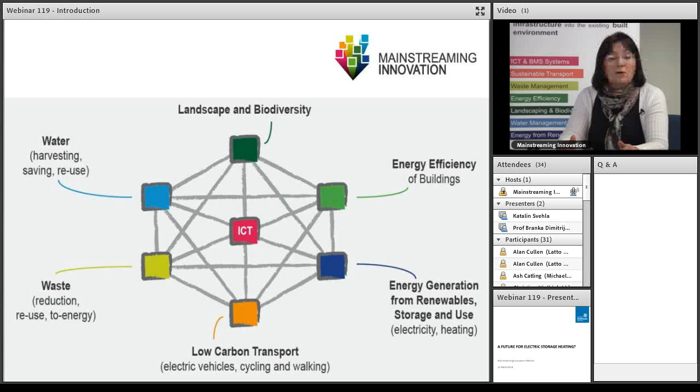So that is a brief introduction of our webinar on the future for electric storage heating. This is a webinar that will be presented by speakers and researchers of University of Strathclyde, and they are Katalin Svehla and Simon Gill. Welcome, and I would kindly ask you to start with your presentations.

Okay, thank you very much for inviting us to give this talk. You'll see that our version of this talk has a question mark after it. Does electric storage heating have a future? It is a very unfashionable topic at the moment, very 80s technology. Lots of storage heaters were introduced all over Europe when they were building nuclear power plants in the 1980s. And now they're all being ripped out again as fast as people can take it, because it was clunky, it was not so easy for the occupants to use, and the focus of modern technology has moved on to other things.

However, given that the future world of renewables requires storage, and storage is the holy grail, I think it's been called in other areas, for making a green electricity grid function. And actually we've got a lot of distributed storage out there, although it's an old technology. It's proven, it's relatively cheap to install, and it's got a high energy storage density. So, question. Does it have a future? Can it have a future in a green grid world?

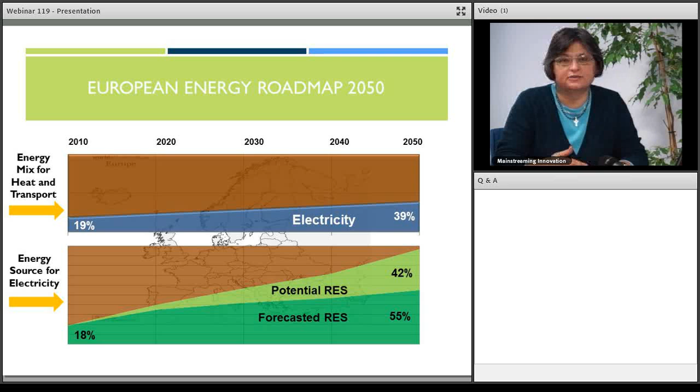So in order to make that happen, a lot of things need to be put in place, because we're certainly not there now. And there is a great deal of work at every level, from European down to individual network level, around how do we make the transition from where we are now to a smart grid enabled world where all the systems are interconnected, everything is flexible, everything can be changed very quickly, and where there's a lot of storage and distributed storage.

And although I don't think Glen Dimplex would claim that they're going to solve the whole smart grid problem for Europe, they see distributed heat storage and flexible demand as a key component of the end solution.

And they look at it from the point of view of what's happened to telecommunications technology over the last 25 years. Certainly when I was going to university, we had fixed telephones. It was a single centrally controlled system, and the telephone at the end depended on everything happening in the middle, in the centre, to work correctly. Today, we just expect telecommunications to be there everywhere and at all sorts of levels in our day-to-day lives. We expect two-way data flows, not just one-way. And this has happened quite quickly, in fact.

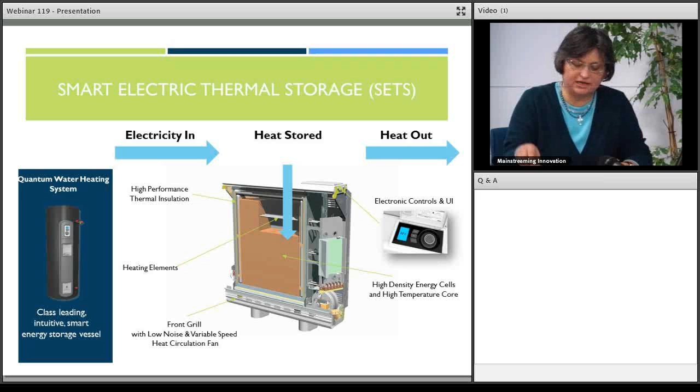How am I doing for time?

But also there is an element of hot water demand for the water heaters, which goes on all year, and so the smart heaters will perform both in the winter and the summer, and a little bit matched to the profile of demand. Okay, so this is what the heaters themselves look like. They're quite smart and elegant looking, and they have a whole slew of user set controls. They can be set just like a normal central heating system.

Finally, looking broadly at the European level, there are an enormous number of existing dumb electric storage heaters out there. And if they were all to be replaced with smart heaters, you would get storage capacity in the multi-gigawatt hours magnitude. Sorry. So it's a technology that has a potential that is way beyond what this laboratory gives. I'll hand over to Simon to talk now about the point of view of the network operator.

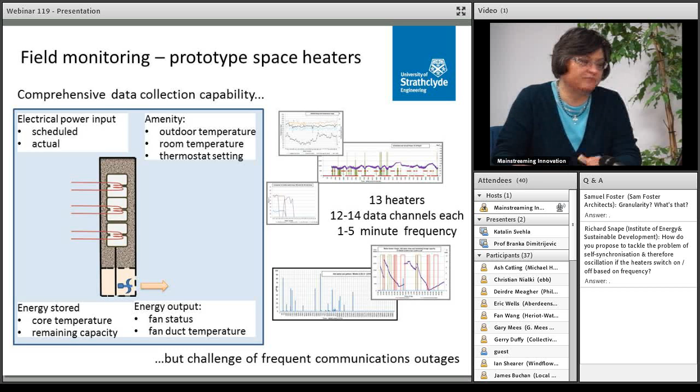And what we see in the 6 houses is that the 3 who were previously much warmer than average have now got a cooler temperature. The 3 that were cooler than average have now got a warmer average temperature. So there's been convergence in living room temperatures to something that is actually considered to be a very comfortable, neither too hot nor too cold winter living room temperature. And that's a good indication that these heaters are more controllable, that they're not leaking heat in the way that the previous versions were.

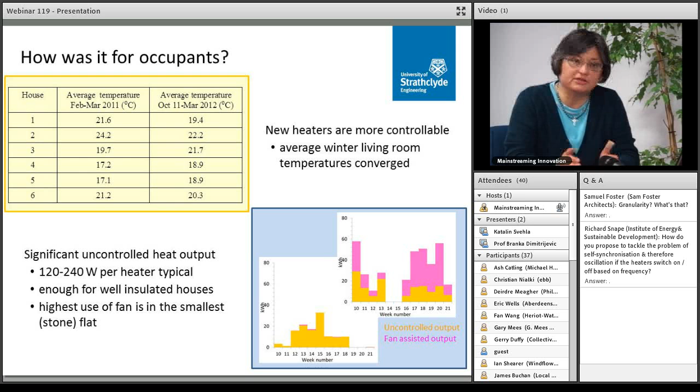On the top right hand, it's a different house, a different family. They like to keep the temperatures warmer, and therefore the percentage of fan-assisted output was quite high. But these heaters still will output between 120 and 240 watts at the level of fill that they were doing in the trial. And because these were exceptionally well insulated houses, they didn't really need the fan at all. And in fact, the smallest property by far, which was the converted stone flat, made the greatest use of the fan.

Okay. So the second side of this was, how do these things perform from the point of view of the network operator? Now, during the trial, of course, these things were not actually connected into the central control system. They were connected into something that mimicked that. But still, how does the total performance work for the network? And the first thing we saw was that the heaters rarely ever use more than 40% of their storage capacity.

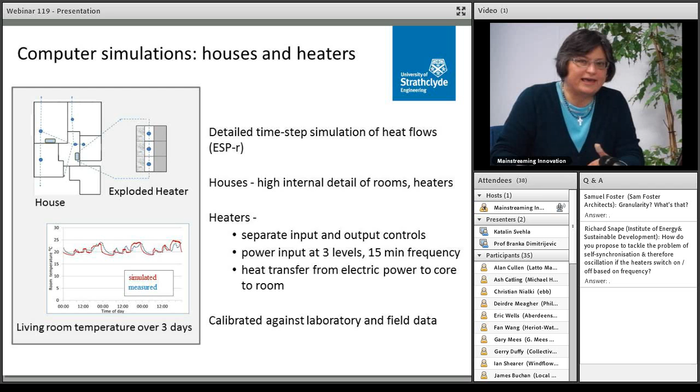And we finally calibrated those models against both laboratory data and field data. On this slide you'll see the agreement over a 3-day period between the room temperatures in the simulation, which is in red, against the room temperatures that were actually measured in the field. So we think that these models really are a good tool for doing more exciting trials of operational processes.

So then we went to look at just how sensitive these houses are to different schedules. We looked at several different approaches to charge scheduling. We looked at changing the timing of the energy delivery into the houses, and we modelled the standard, default scheduling, which is teleswitching, which is what most storage heaters around the world operate on. There are certain tariff hours during which the heaters charge if they can,

and then they switch off when they're full. We also looked at what happens if you deliver exactly how much energy the house is going to demand each day. Then we looked at, if you don't get that quite right, you might be storing a little bit of wind from one day to the next. So we've got not quite exact demand daily charging.

And then finally we also looked at a scenario which we called high wind storage, where you would plan to deliver up to twice the day's demand on a day when there was a lot of wind, and you would plan to deliver nothing at all if you could, if it was low wind. So that was energy delivery approaches. We also looked at whether there is a difference depending on whether you charge it early in the morning, in the middle of the day, or late at night.

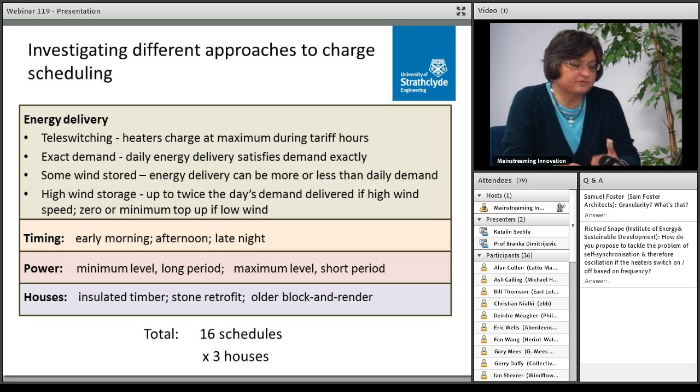We looked at what happens if your charging is at the lowest power level over a long period versus at a high power level over a short period. And we also looked at 2 of the houses that were in the trial, an insulated timber house and a stone retrofit. And although we didn't have the monitoring data for it, we also modelled an older, leakier, less well insulated house as well. So we did 3 houses, and there were 16 different schedules applied to each house.

This first slide shows the outcome of those studies in one of the houses on the living room temperatures. Each band shows a different schedule, and the colours represent 20 percentile intervals. Again, this is over time during occupied hours only, what the living room temperature was like. And apart from teleswitching, where the living room temperatures were considerably above the set point, simply because the heaters would charge when they had capacity to do so, for all of the active schedules there was hardly any difference noticeable.

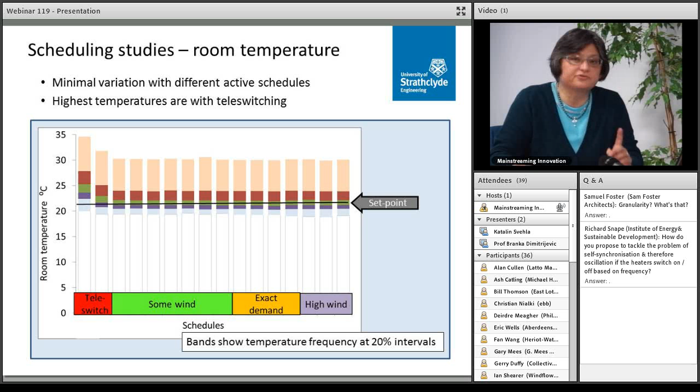So from the occupant point of view, the first lesson is it doesn't seem to really matter when you charge or what power level you charge. They will experience the same kind of degrees of comfort. So that was one finding, and this goes for the leaky house as much as for anything else. The second thing we looked at was whether the different schedules mean that the occupants can have some kind of penalty, so they are forced to use more energy than they would otherwise.

And so we looked at the total energy used between January and April. We ran the simulation for 4 months, and we compared that to how well the devices were following the schedule that they were instructed to do. And once again, you'll see that nearly all of the schedules that we tested fell within a very, very tight band up here. So all the active schedules ended up with roughly the same behavior from the point of view of controllability, and the biggest total consumption difference was 7% more or less than the best case.

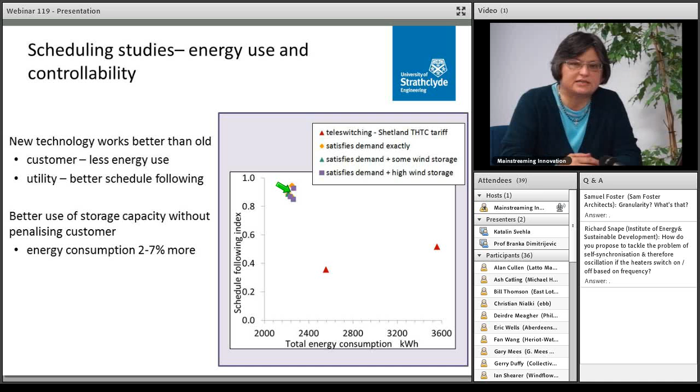So this technology allows the customers to use less energy than teleswitching, and it gives the utility better confidence that the instructions will be followed. These two red triangles represent the various versions of the teleswitching schedule that we applied. So far so good.

There are some secondary lessons from the simulation outcomes. So there's a little bit of an influence of the time of day. These charts show 4 different schedules, and the green bars show times when the heaters were charging outside of instruction, and the brown bars show when they were charging to instruction, and the time of day is the horizontal axis, and then each day of the year is on the vertical axis.

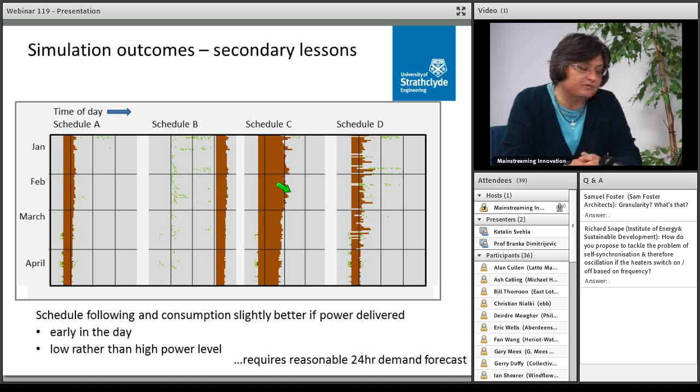And so it is a little bit better if the power is delivered earlier in the day and at a low rather than high power level, but it's a small difference, and it's something that probably could be handled via either changes in tariff or some slight changes in schedule forecasting. It does require a reasonable 24-hour ahead demand forecast for each house, however.

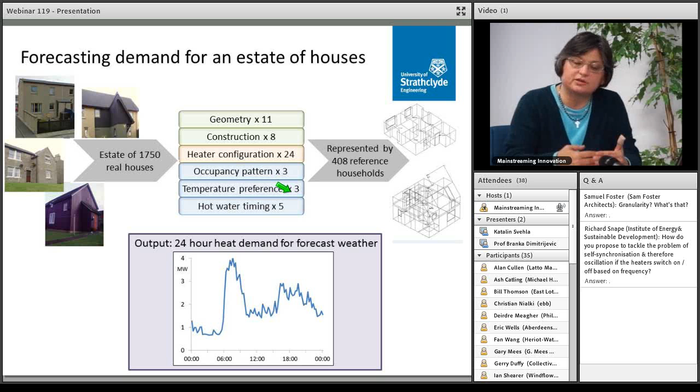I think in the interest of time we'll pass over this one quite quickly, because we also built a forecaster that was capable of coming up with a 24-hour ahead demand profile for not just one house but the whole estate of houses that was planned to be run, and come up with a 24-hour ahead demand forecast given the expected temperature next day. And this 24-hour demand forecast then is what we pass to the network modelers, so that they could look at the active network demand. And I'll hand you over to Simon now to talk about taking this to the next stage.

Thank you. Right, I'm going to try and go through the network modelling, probably in about 10 minutes or so, just to give you an idea of how long we'll go on for. If I skip over any slides quickly in the interest of time, I'm sure they'll be available online afterwards, and you're more than welcome to get in touch to ask any questions.

So from a power system perspective, I think studying power systems allows you to ask the question of why, the overall reason for why we're doing this. We live in a society which uses quite a lot of energy, and a lot of the pressure on us at the moment is to think about reducing energy usage or decarbonising energy usage. And the power system, the electrical power system, is one way in which we can do that.

So the traditional way of managing a distribution network, that's the low voltage part of the electricity network that comes into your houses, your offices, etc., is to do it in a very static way. You do lots of studies when you set the system up, you connect generation to it, but you only connect enough generation so that it can operate under all circumstances, excluding some fault circumstances, but under all normal operating conditions you can allow your wind generation that's connected at distribution level, your solar generation, your biomass plants, whatever it is, to operate as they want without you, the network operator, doing anything about it.

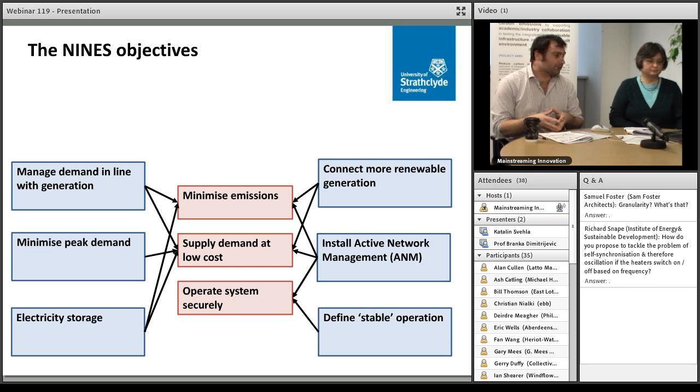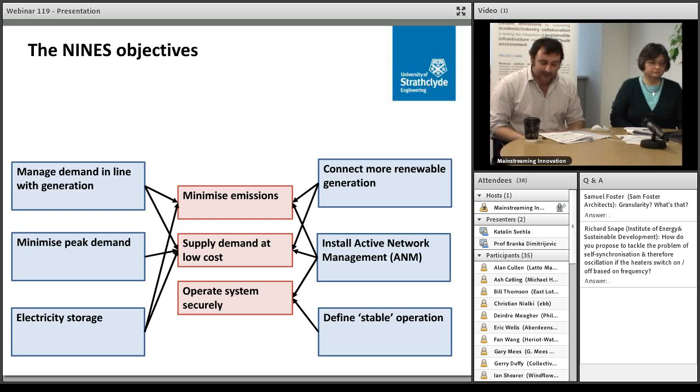But as soon as you ask wind generation to curtail to reduce its output, you then have an opportunity to try to use more of that potential generation within the constraints that you sit within. And that's where flexible demand, energy storage, frequency responsive demand on Shetland all come into play. And the left hand side of this diagram talks a little bit about that. Managing demand in line with wind generation, minimising peak electrical demand, making use of electrical storage.

Now, this graph here you'll recognise from Katty's last slide. It's an example of the underlying demand for heat within a group of houses in Shetland across one day. There's a peak in the morning when people get up, and it's generally higher during the day than at night. That's something that makes sense. Now, that has been managed for the last 20 years or so on Shetland using teleswitching, as I'm sure many of you are aware of.

Teleswitching allows you to fix when storage devices can charge within certain parts of the day. But on Shetland, and I think in most places that it's used in the UK, that schedule is fixed, so it operates the same schedule every day. That's good for managing variations in demand, because demand variations are fairly reliable. There's always a morning peak, there's always an evening peak, it's always a low demand overnight. So that's what's been done on Shetland for quite a long time.

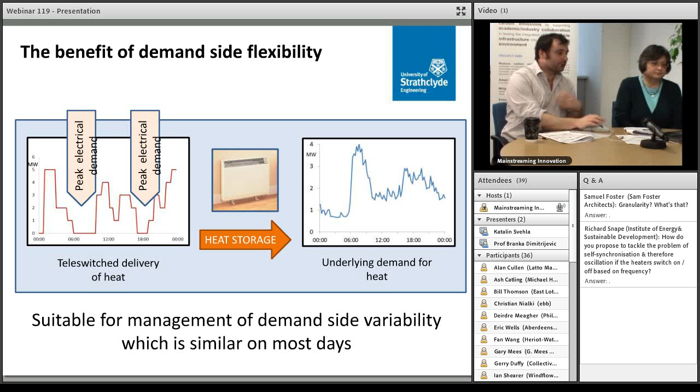But when you have an excess of wind generation and you're trying to manage the variability of wind, that's unique every day. You can't define a time of day when it's always windy and it's not always windy. At least you can't do that in the UK. So that's where unique schedules made up every day based on what you expect to happen over the coming 24 hours are required. And that's part of what the power system centralised intelligence has tried to do.

What it tries to do is to take forecasts of demand, take forecasts of wind generation for the coming 24 hours, and use those to build a schedule which it then sends out to individual houses, which then attempt to implement that schedule. Now, that schedule doesn't always get implemented, because it's also important, and in some ways more important, to make sure that you meet customer expectations.

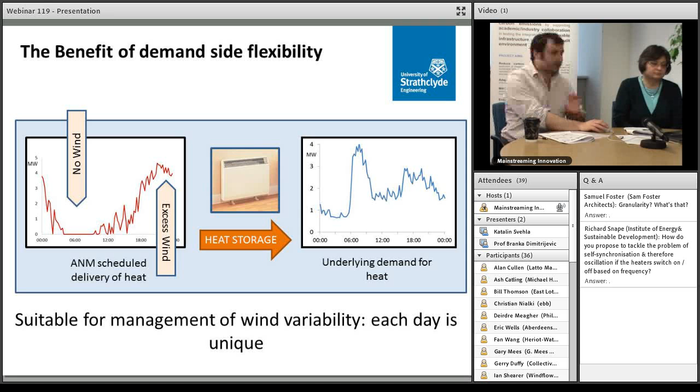Now, that's in terms of keeping the temperature in the houses at what people expect, making sure that they get what energy they need, and so those often take priority over the power system. But there's an interesting kind of combination of the two that we try and use there. So coming back onto the power system side,

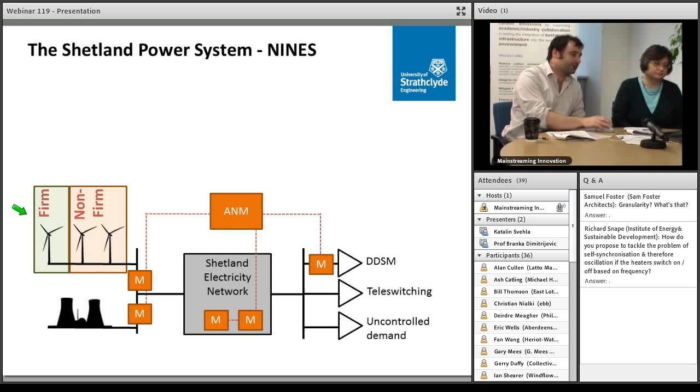Now, as I said before, to operate an ANM system, you need to define what the limits of wind generation are. And on Shetland, it's to do with frequency. So one of the issues with wind generation, particularly, it's called distributed wind generation because it's connected to a distribution network, and there's certain prerequisites in terms of protecting the network and the generation. So in the event of a fault, distributed generation such as this wind will disconnect from the network, and that can lead to an instantaneous loss of generation.

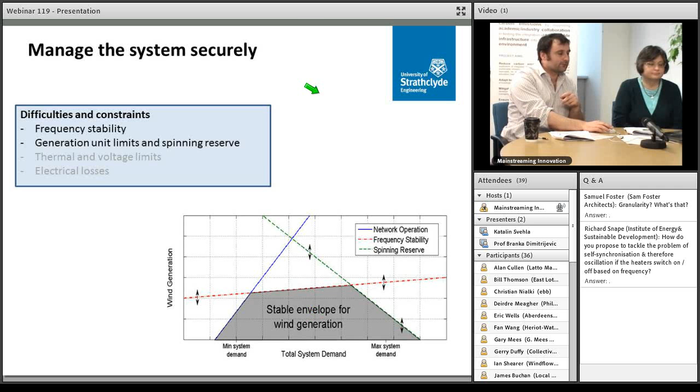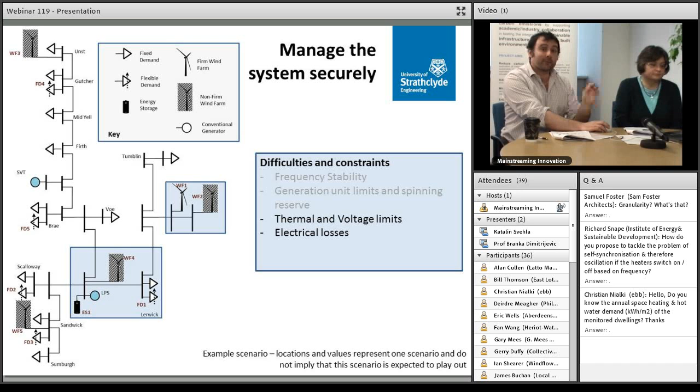Okay, so this is a network diagram of Shetland. I'll not show it for too long. If you're interested, you can have a look at it offline, because it shows you where all the various components fit within Shetland, and if you know the area, you can see from the names of the system buses where they're located on the islands. But basically, that's what we're trying to manage: the non-firm wind generation connected to the island, and then we're trying to manage flexible demand in line with when we expect that to be curtailed.

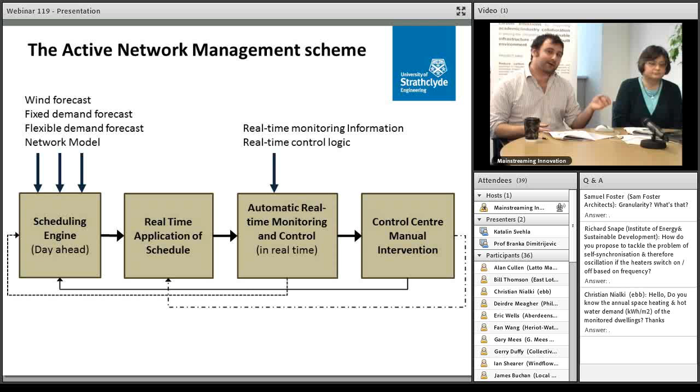And if that means that you need to curtail wind more than you expected, it will do so because it needs to do that to maintain the system security. It can't allow extra wind on because maybe it's more windy than the forecast said. So the system is always secure, and you're trying to make that schedule as good as possible to get the most benefit out of the flexible demand.

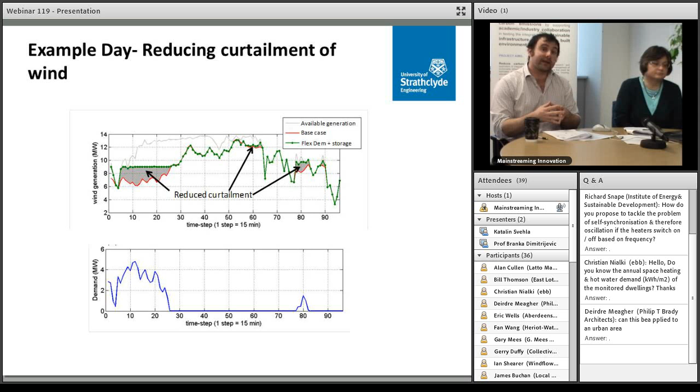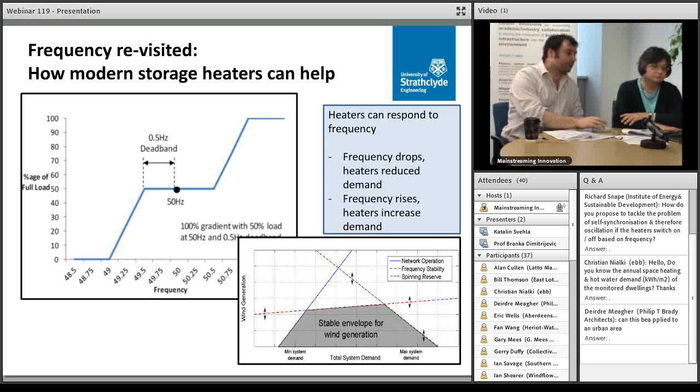Reduced demand in terms of frequency is the same as increased generation, and so that support allows you to actually fit more wind on and support the frequency, because you know you have that situation. There's that stability graph that we talked about before, and with frequency responsive demand, the red line can increase, can rise up.

Okay, so running some simulations, I'll not go through the details, but just to give you an idea of what you can achieve by this, I've shown the capacity factor of each additional megawatt of wind generation connected to the Shetland network. If there's no curtailment, in the year we chose, it had a capacity factor of about 0.45. Okay, as you connect a little bit of new wind, there's very little curtailment.

Now, follow the blue line on that graph, the lowest one. As you start getting above 5 megawatts, the capacity factor drops off because more and more wind is curtailed. Taking, as a very hand-wavy kind of way, the capacity factor that's needed before you have a viable wind project, the UK average is approximately 0.25, so the black dashed line is an indication of what might be viable. And the blue line and the black dashed line intersect at about 14 megawatts. So that's how much, in our simulated case, is viable.

Now add the flexible demand on, and you move up to the orange line. The area between the blue line and the orange line is the increased generation, and the distance between where the blue and the orange line intersect the black line represents how much additional capacity might be viable because you have flexible demand. So in this case, without being too precise, because this isn't a precise science in the real world, you might get an extra megawatt-ish to connect.

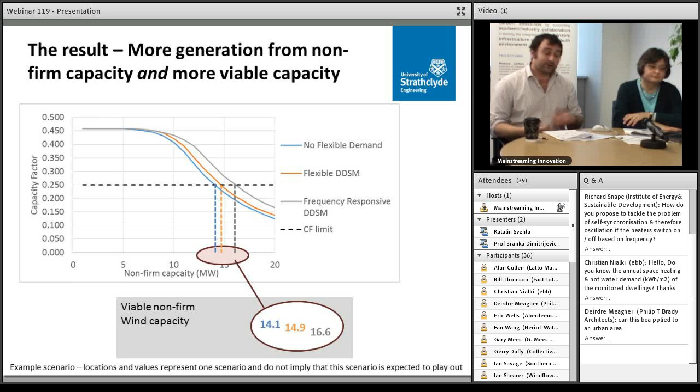And finally, just to pull that back to the UK mainland, on the UK mainland we have a much bigger system, but we still need frequency response, and that's almost always provided by generation. But through a system like this, an aggregation, a big group of houses, maybe all the houses in a certain town, could club together and offer frequency response service to National Grid, that's the UK system operator. The system operator pays for that, and that money could then be distributed among the consumers themselves as a way to reduce bills for mainland customers as well. So it's a really interesting topic, I think.

So that's the end of my section. So I think we just have a couple of conclusion slides. Yes, just to recap on what we've been talking about today.

Decarbonising the electricity network will require a higher proportion of renewable generation, and that'll require storage, and the new generation electric storage heaters can provide significant cost-effective controllable distributed storage across Europe. Field trials of this technology show that they'll work without impacting customer comfort, although we have to remember that customers don't always use the technology as we expect, and that the storage heaters can provide flexible demand and storage for excess wind over a period of 1 to 2 days, and even over 2 days there seems to be no impact on either customer bills or comfort levels.

And we can also say that using simulation is a good means of exploring these new operational options without risking too much in the real environment. Oops.

Okay, and just my conclusions from the power system side. Shetland really is a pretty advanced smart grid. In terms of the UK, I would say by the end of this year, with everything that's rolling out on Shetland, it's probably the most advanced smart grid in the UK. And that's being driven by the peculiarities of Shetland, but the learning that we'll take from there is going to be applied across all distribution networks in the UK.

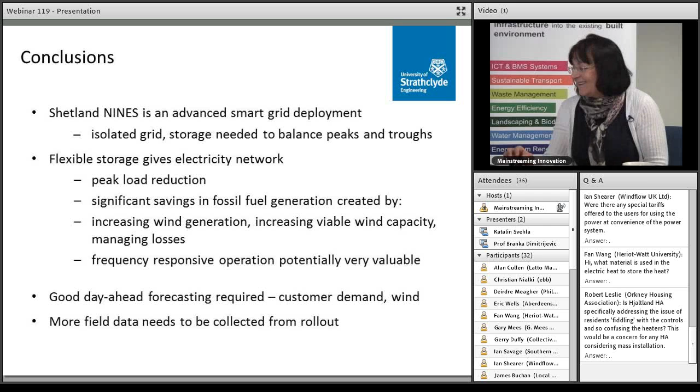A question about materials. What material is used in the electric heaters to store the heat, if that can be disclosed? It's predominantly magnetite, which is an iron oxide compound. But it's magnetite that's specially milled, rolled, crushed, compressed and processed to have at the same time a very high heat capacity and also quite a high heat conductivity, because ceramic materials tend to not be that conductive. So the absolute details of the material that make up the core tend to be not published, but that's roughly what it is.

Is the Housing Association specifically addressing the issue of residents fiddling with the controls and so confusing the heaters? This would be a concern for any housing association considering mass installation. Absolutely. During the rollout, having learned from the six house trial, they've put massive extra efforts into producing really simple to use guidelines, giving each household some basic training on how to use the controls, and they still have the dedicated housing officer to answer questions.

But that said, there's nothing that makes people read instructions, and tenants will change anyway. So yes, it's going to be an ongoing challenge.